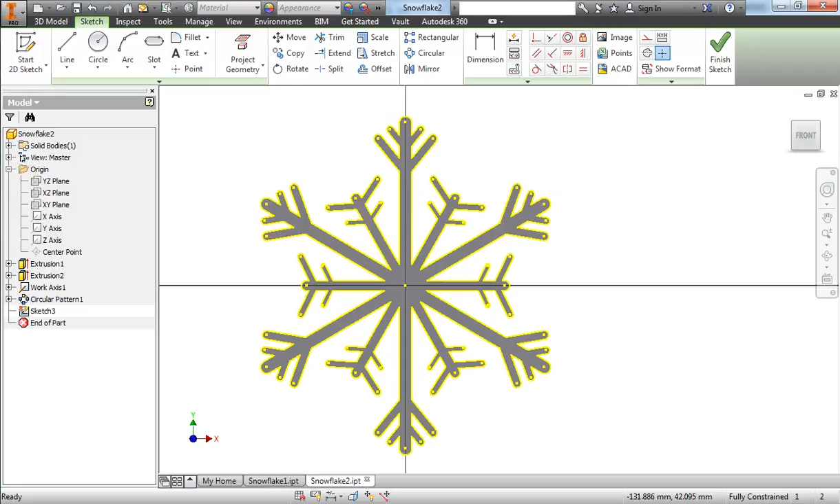So what I wanted to do is show you Inventor, and there's one that I did. Let me go to a new part file. I wanted to show you a tool that maybe you're not familiar with. When you look at some of those shapes, people did not recreate the geometry of those.

Like, think of on this snowflake, that piece that's straight up. Well, it's there, so let's see, there's 1, 2, 3, 4, 5, 6 of those, right? They did not design that in their CAD software 6 times. And then in between each of those, they've got another kind of branch of the snowflake that looks like it's a repeating pattern. So they wouldn't have to go in and recreate that 6 times. That would take a long time.

You've already created the geometry once. How do we kind of copy and paste it in a circle? So I want to show you that.

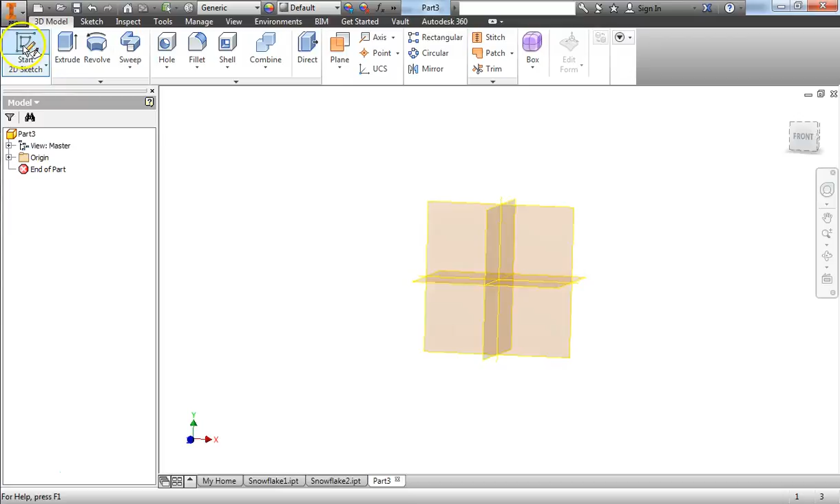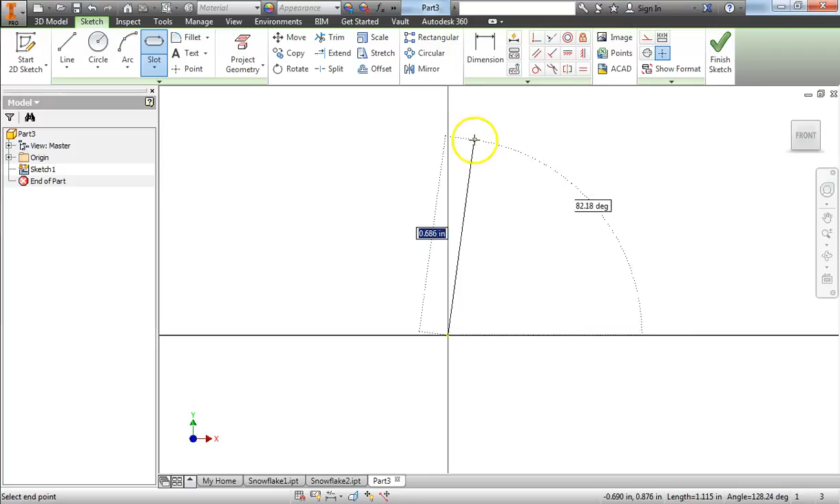All right, so I'm going to start a new sketch, and for the sake of time here, I'm not going to get too complicated, but what do I want to do? How about I'll grab this slot. The slot tool is, see, height-wise, I'm going to go about 2 inches up. So let me zoom out a little bit. If I spin things around, I'm shooting for more of like a 4-inch overall size height.

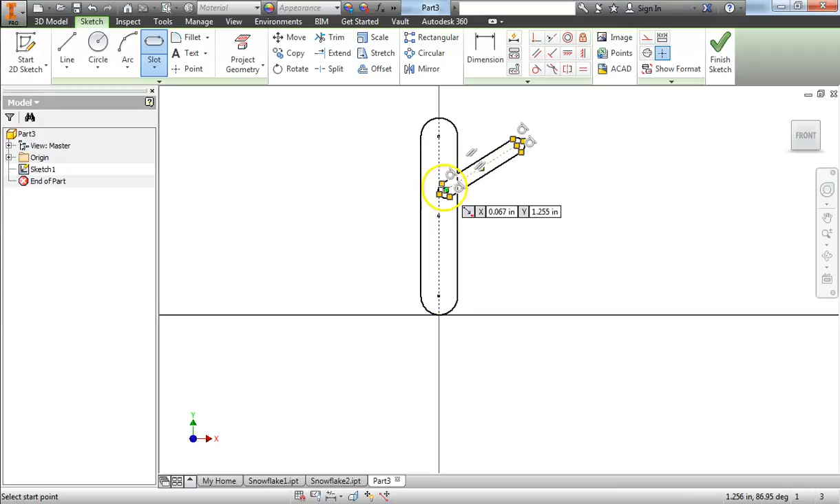I'm not going to stress over that, but let me just create that, and I'm going to create like that, and I'm going to come in here, and now I could dimension and get these things to be the same, and I don't have to use the slot tool, but okay, so let's say I've got this, and that's kind of part of my snowflake. So let me turn the slot tool off.

I would like to repeat this pattern in a circle. And we have this panel right here. I don't know why the word pattern's not showing up. Usually underneath here it would say pattern, but I've got the circular pattern tool.

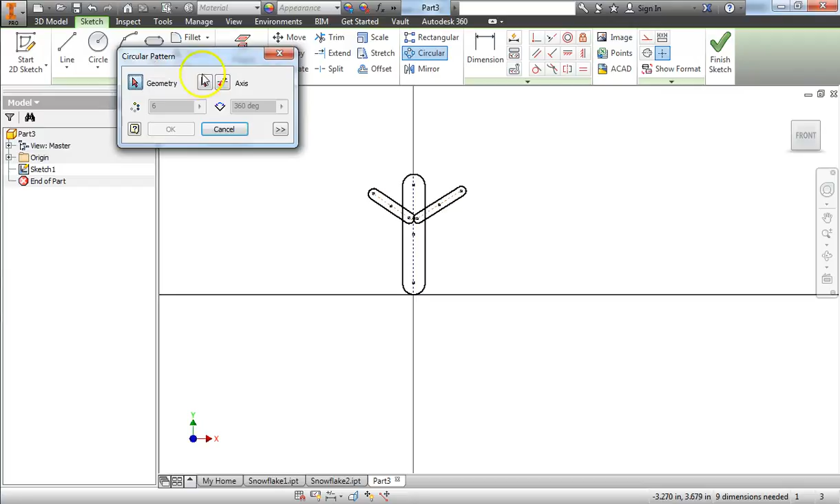And how this works is, first you select geometry. That button is already selected when I turn the tool on, and so I want to select the geometry that I want to pattern. So I'm going to grab all of that, and then when I'm done selecting the geometry, I have to choose this arrow to say, now I'm going to choose an axis. And it's really going to be, for this sketch, a 2D sketch, just a point that I'm going to spin around.

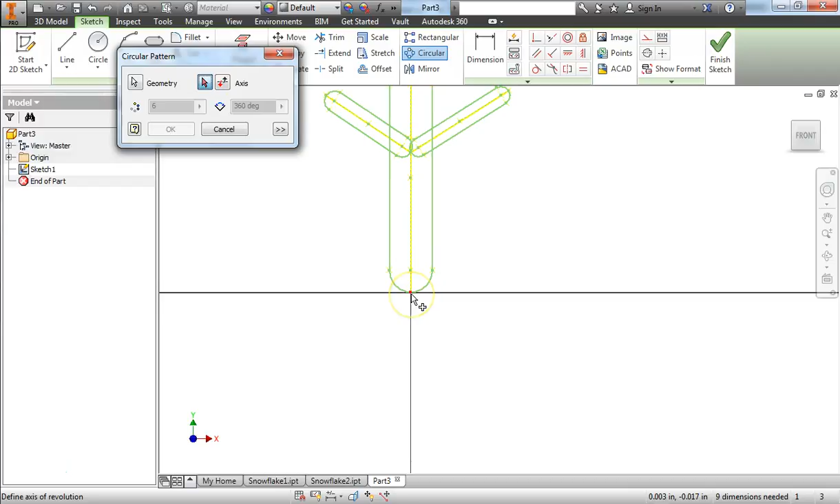Okay, so I chose that point. Already I'm getting a preview of what's going to happen. I can choose how many degrees that I want it to spin, and then within the number of degrees I can say how many times within that I would like it to repeat. So repeating 6 times within 360 degrees looks like that.

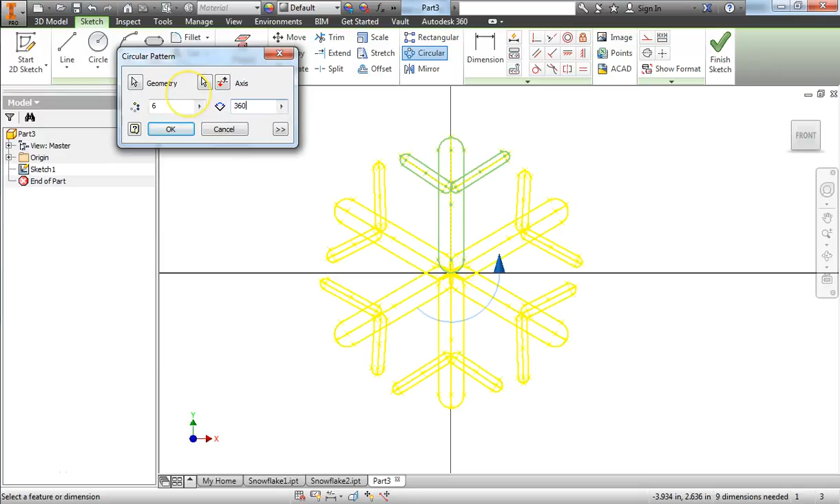As you can imagine, I'd probably like to stay with 360, but I can change from 6 to 5 or 4. I always think odd numbers look nice. All right, and I can hit OK.

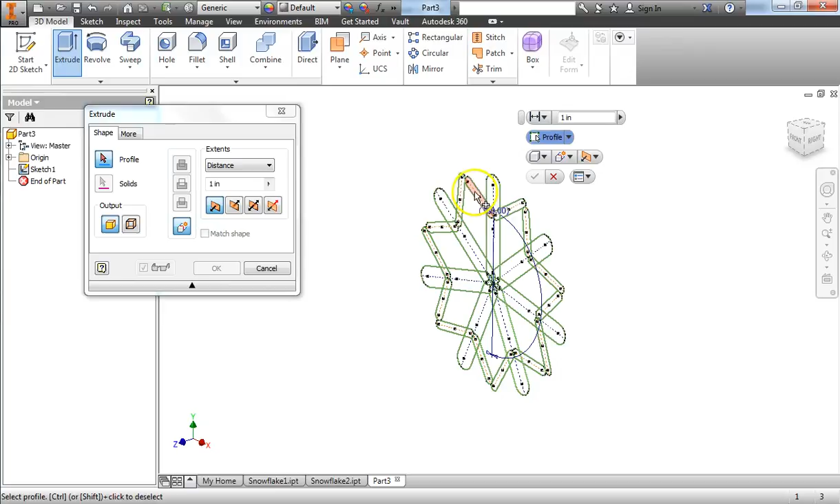Let me go ahead and hit Finish Sketch, and let's see if this is going to extrude. Sometimes you have trouble with extruding loops that are overlapping or have been patterned, but this looks pretty good.

And so I knew, let's see, the material thickness is 5 millimeters. You can type in mm for millimeters, and Inventor will do the conversion. Even though the document is in inches, I type in that.

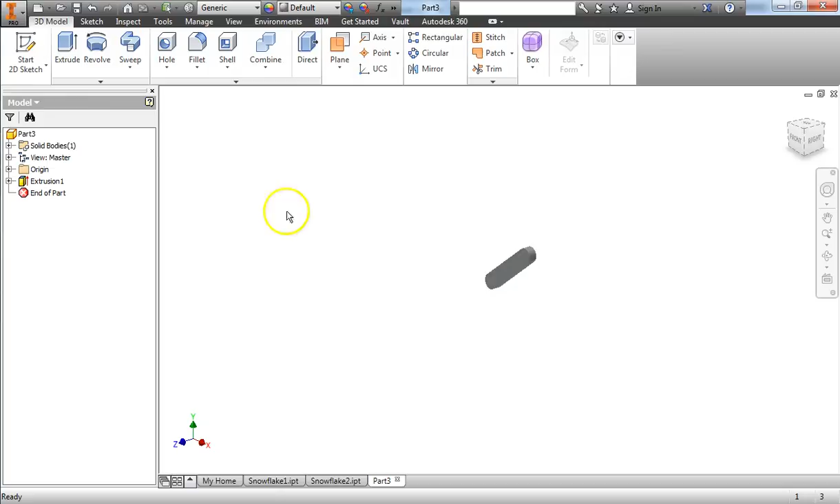Edit feature. I didn't mean to be done. I wanted to select the other profile. So I'm going to edit feature. I right-clicked on the extrusion, and I want to come in and click that to say I'm going to select

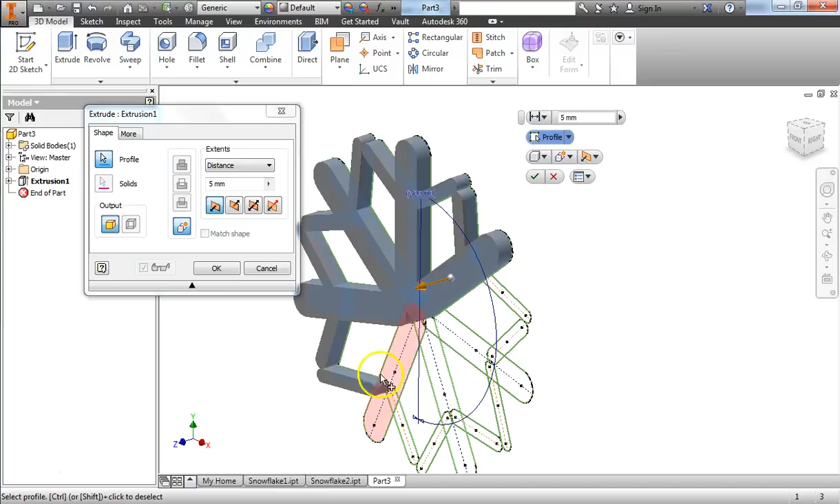profiles to extrude. So I'm going to go through and select all of these little branches, arms, these kind of ice crystals, if you will. And there is a snowflake. That easy. Hit OK, and I've got a snowflake.

All right, so there's one. You guys can play around. You can try to make another sketch. If I right click on that and say new sketch, if you wanted to add some more detail, again, you play around. You can play around with other things, like I just grab that slot tool.

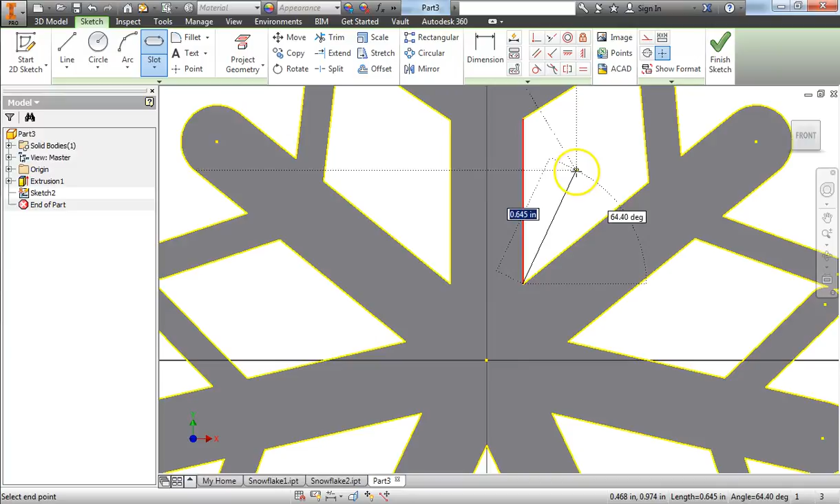But what if I've got that? Let's see, there's 1, 2, 3, 4, 5, 6, 7 of those kind of diamond shaped gaps, you know, after spinning that around, right? So can I circular pattern tool this?

Makes me grab that slot, and I got to select all the little pieces to it. Now the axis, I'm going to spin around that point again. Can I spin around 7 times? Does that actually, look at that, lines it up.

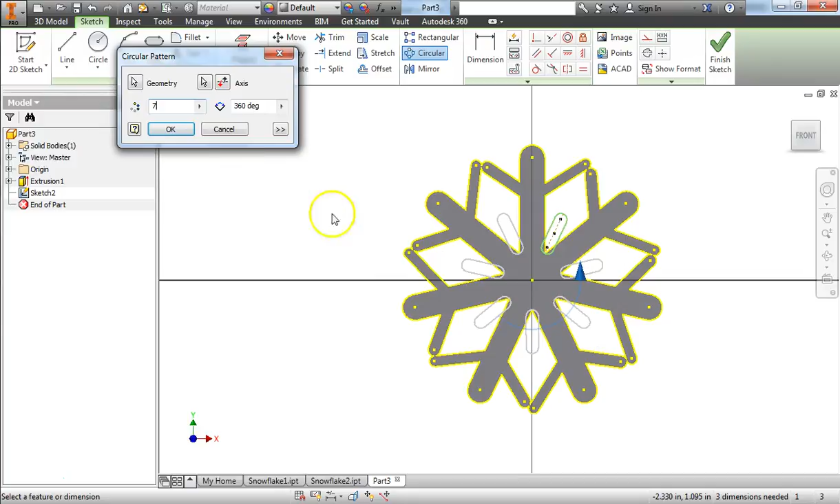So, and then I can extrude that. Oop, cancel. It got the wrong profile. I want to make sure I do not get the diamond shape, just that little slot.

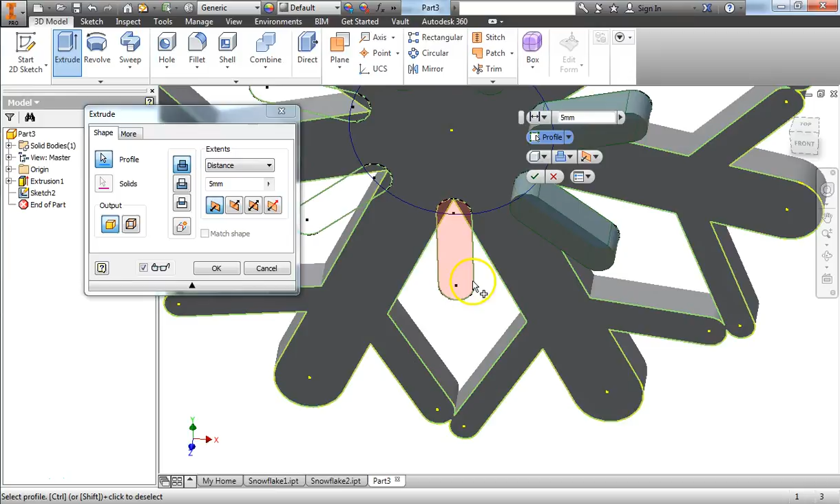I'm just adding a little design there. Sometimes changing the zoom level helps you get the piece you wanted if it's not wanting to select the profile you want. Okay, now looking at this from the side, look at how that profile is offset.

I didn't mean for that to happen, so I can change the direction. And Inventor's going, wait, there's already material there, so we think you maybe want to do an extrude cut, and so it's actually removing material. And you go, no, that's not what I wanted. I actually wanted to make material.

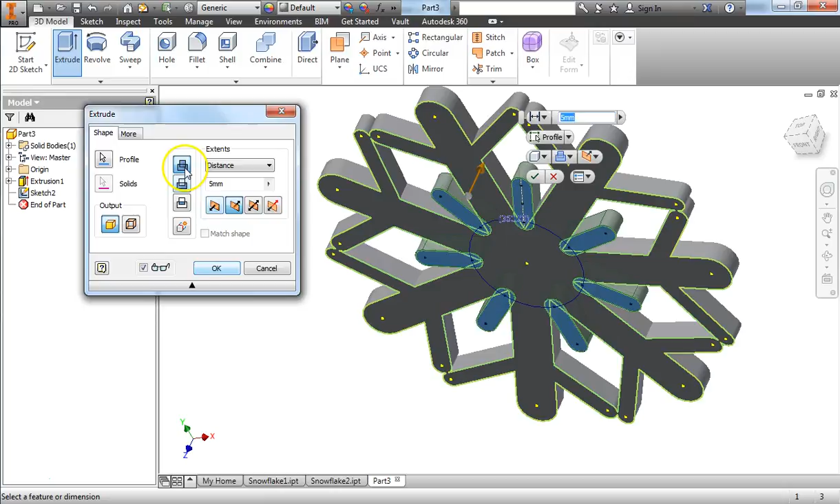So I just got to go back and say join, and then hit OK. And look at that, that's another little detail. Isn't that cool? All right, so there is some inspiration.